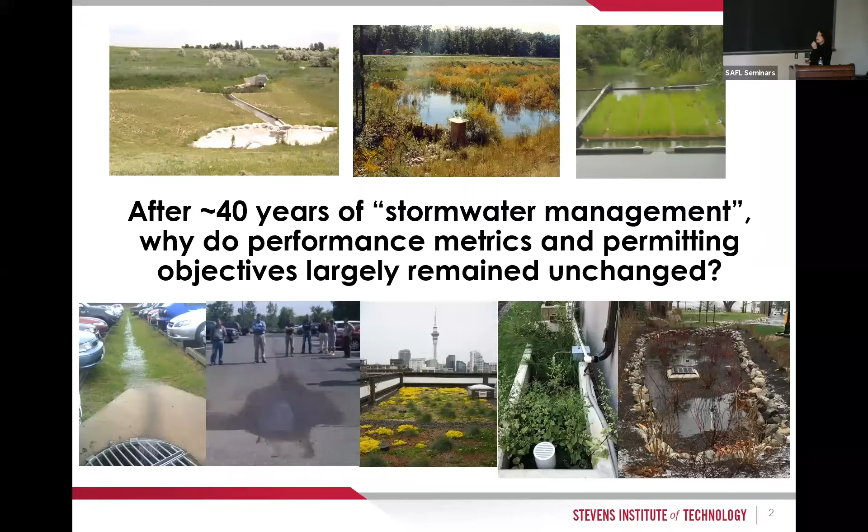All right, but it's been about 40 years of stormwater. It's been about 40 years since the NPDES permits came online, and 30 to 40 years of stormwater research. And we've changed the technologies. We as researchers have tried to improve the technologies, but ultimately, even after about 30 to 40 years of stormwater management, the metrics that we use to assess performance and the permitting objectives, the policy aspects of it, have largely remained unchanged. So I think it's a fair question to ask: if we've been developing these technologies and understanding them better, and we can design them better, but they're still being built to old standards, it seems this is a conundrum, and to me, this is possibly the biggest impediment to actually protecting downstream environments.

It's a really important question to consider these performance metrics, because regulatory services and policymakers tend to be the ones who issue the design guidance. So policy drives BMP design. The policy folks are usually the ones issuing the design guidance and setting minimum standards. And let's face it, the vast majority of designs that are submitted or built are built to minimum standards. So there's a very strong link between policy and design.

I think about these links at 3 scales, broadly speaking. Some jurisdictions have more forward-thinking objectives, but we're talking at the broad scale here. At the site scale, you've probably got a design engineer who's primarily concerned with an NPDES permit.

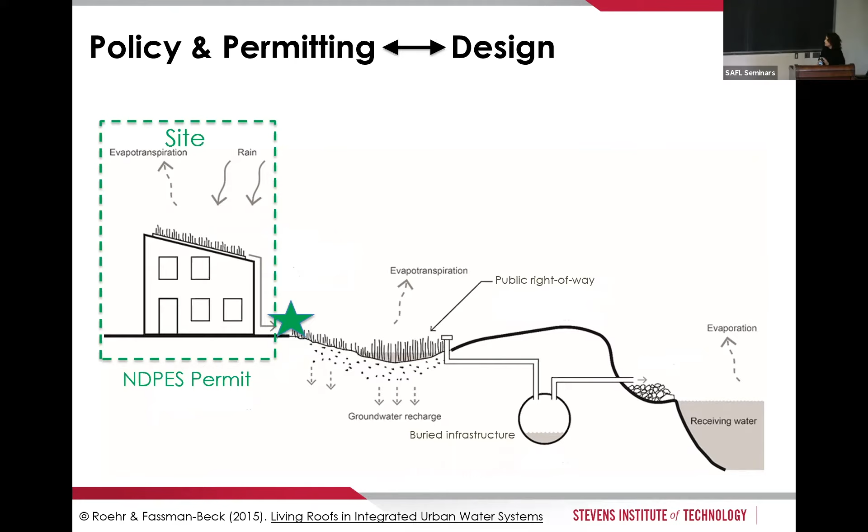Those permit conditions are usually some arbitrary set of flow controls and maybe an 80% TSS reduction. And the design approach is probably based on a rule of thumb and some percent removal, maybe TSS, maybe some nutrients, but that's all they're trying to do is meet those permit conditions.

At the watershed or sewer shed scale, we're really policy driven, trying to meet TMDLs, which apply around here. You've got some TMDLs you're working towards. In the Northeast, there's a lot of CSO mitigation, and broader in the Great Lakes area, there's a lot of CSO mitigation strategies designed at a watershed or sewer shed scale, but again, driven by a policy objective.

But ultimately, what we're really trying to do when it comes down to it is protect or restore a downstream environment. We're trying to protect and restore beneficial uses or ecosystem services. And whatever we do at these scales is ultimately supposed to have an effect over here.

But the question is, with our design objectives, and I'm going to focus really at the site scale today, do the design objectives we have here and the metrics for designing, building, and assessing performance really have any meaning when we get down here?

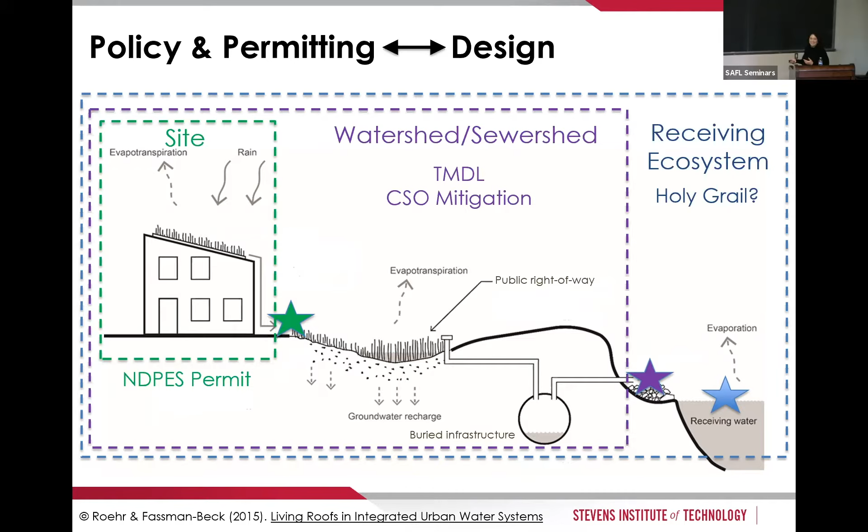So as an example of a typical site-level stormwater control measure or best management practice, what's the term that you guys used here? Best management practice? Okay, so we'll go with BMP.

Right, let's just add the acronym thing on top of everything. So feel free to shout out if I'm using an acronym that does not apply here, and I'll translate. Right, that's my international experience. I can translate stormwater acronyms all over. Now I'm learning a whole new set for Minnesota.

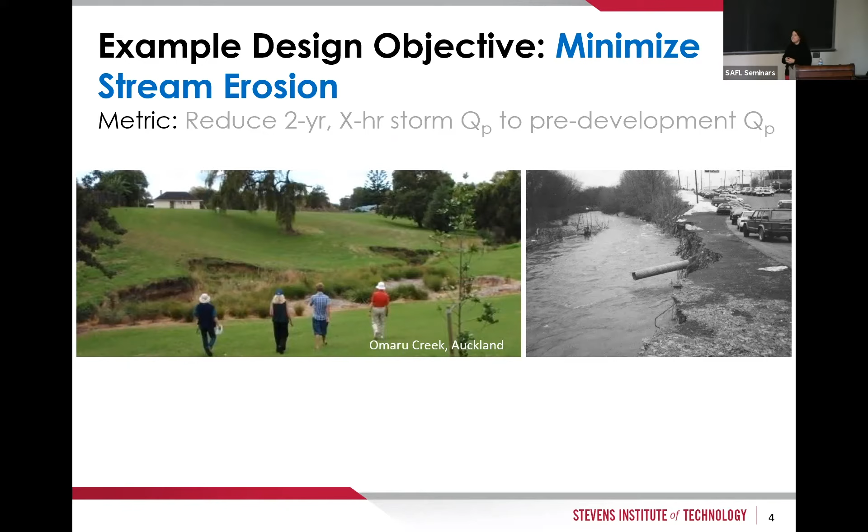Does anybody know where that comes from? I think John does, by the way he's smiling. Does anyone know where this comes from? Research, yes, in 1964 on natural streams. This research, led by Leopold and his group on natural streams, identified that bankfull flows were important in stream geomorphology for shaping the stream channel, and bankfull conditions typically occurred in natural streams from a 2-year flow, a 2-year return period flow, not storm, but flow.

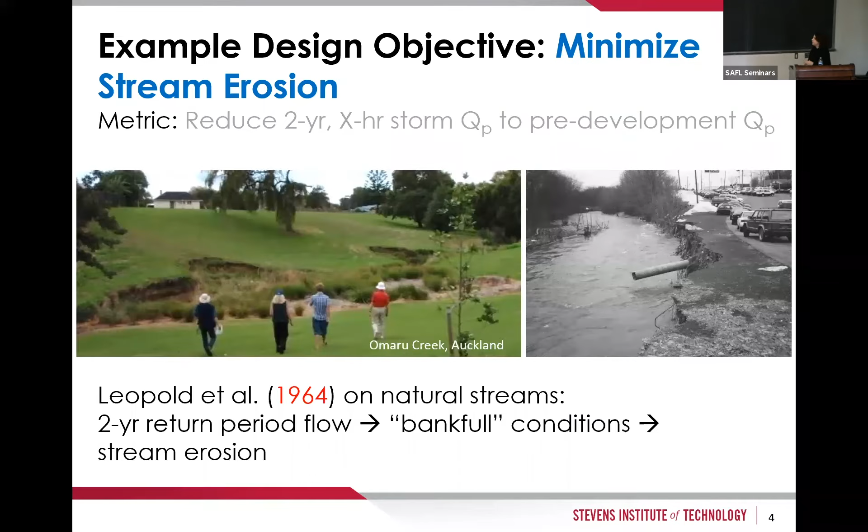So in the absence of anything else, this idea found its way into stormwater management to protect streams from erosion. This is ubiquitous across the US, in New Zealand as well, probably elsewhere. There's some variation on controlling the flow, the maximum flow from 2-year storms. I'm pretty sure that our urban streams are not really natural streams, and a 2-year flow condition is not going to have much of an erosion impact on a concrete armored channel.

And even here, now these urban streams are in Auckland, but even this one that looks somewhat more natural, you guys might have streams that look like this. This one is still a very highly modified system. This low flow dam actually creates an embankment to promote groundwater recharge on the upstream side. So this is a highly modified environment.

Yes, there are ecosystem services. Yes, there are beneficial uses for these streams, but I'm pretty sure erosion, a 2-year stream flow, is not going to be the driving factor of beneficial uses in these environments.

You know, so 1964, there's been a lot of research since then, but even as far back as, and I say as far back as 1996, because now 1996 actually feels like a long time ago. In 1996, State of Maryland came up with this awesome graph. I love graphs. I hope you love graphs too, because I have a lot of graphs to show you. Even on a Monday morning, I love graphs.

So in 1996, State of Maryland comes up with this assessment, which says that flow impacts and water quality impacts occur over a spectrum of rainfall conditions.

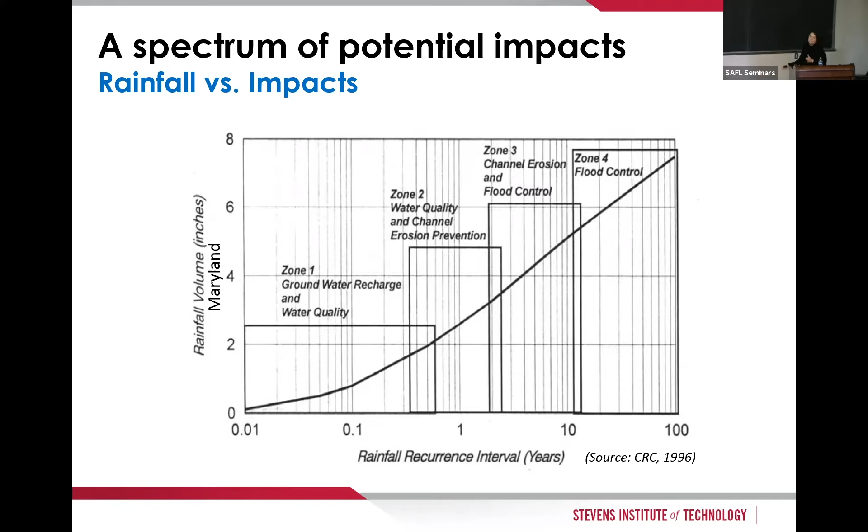Okay, so my objective today then is to just plant some seeds for alternative metrics for BMP design. Also alternative metrics, not just for design, but for how we consider performance, what kind of performance we're considering. And to me, this goes hand in hand, thinking about these BMPs differently, what they're doing and how we design them and what they could do and what we could design them for, goes hand in hand with updating or modernizing our policy and permitting, because they're the ones who hold the design manuals.

And you know, all of this is chasing after that holy grail of having an impact on the downstream environment. I think that we have enough information now, or at least the beginnings of enough information, to really start thinking about how to approach design from a different set of performance metrics that actually could be related to the downstream environment. So I want to give you a couple of examples.

I'm going to rely mostly on my own data. This is not a metadata analysis. I do not have all the answers. I want to start a conversation and show you, and hopefully drop a few little tidbits in there to get you thinking.

So the kind of examples I want to look at are an evidence-derived design of a new green infrastructure LID technology and applied. And basically, this is how we developed green roof technology in New Zealand to do something different. And also a couple of different ways of looking at data that we already have, but in a different way.

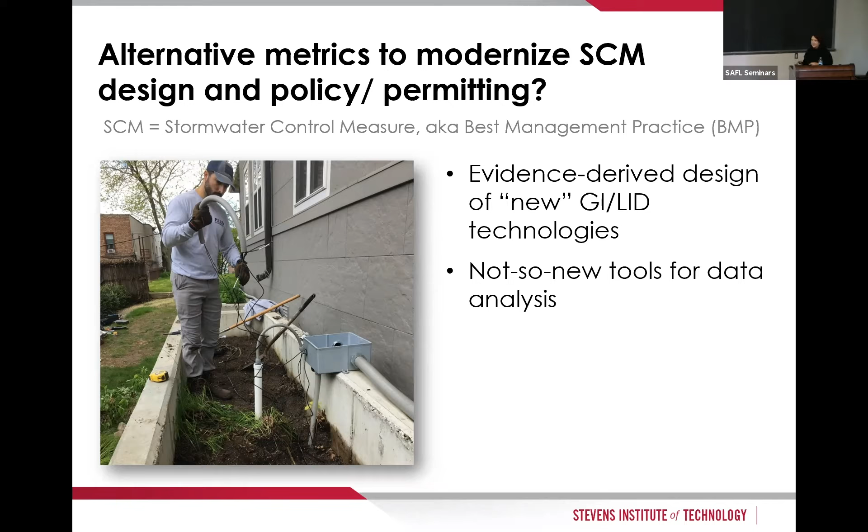And I've written it up here as not-so-new tools for data analysis. So these are performance metrics, or ways of assessing performance, that we all know because we learned about them in hydrology or somewhere else along the way, but we're not really applying them to stormwater just yet. But I think we have information that we can do that.

Okay, so I'm gonna start with green roofs, partly because I've spent a lot of time thinking about green roofs and working on green roof design, but also because green roofs, I think, are a BMP technology that have always been subject to more scrutiny and more misperceptions than other kinds of technologies. And they're not being used that often, partly because they're not necessarily in the design manuals, and that's partly because the regulators don't understand how they work, or they might think they understand how they work and don't believe it.

And then designers aren't choosing them because they're not being credited in a way that helps the site owner. So we've got this little conundrum of when it comes down to it, an engineered green roof is really only a few inches of media. So how effective could it really be, right? How effective could it be for 2-year and 10-year ongoing flow controls? And if it's so shallow and it fills up with water, if you have a really rainy period, it's not going to keep working, right?

We've got all these misperceptions or preconceived ideas about how this technology works that I think are hindering how we think about this practice. Fortunately for me, my research on this technology was initiated at the request—well, not exactly a request, there was a strong suggestion on my part.

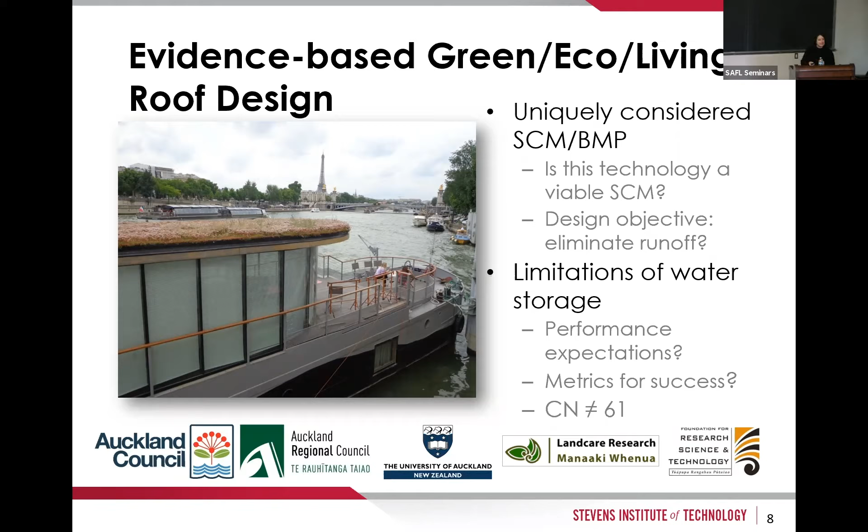to the regulatory agency to look into these systems. So we were able to approach green roofs with an open mind and no preconceived notions. The objective from the regulatory agency was: we're really interested, figure out how to design and build it and what it should do, because right now our manual just says it's a curve number of 61, and I'm pretty sure that's not how it actually works. So we really had a wide open purview.

Here I believe you use the term green roof. In Portland, it's an eco roof. In New Zealand, we adopted the term living roof, because it is a living system and that's integral to the performance. So I'm just going to go back and forth with all these different terms.

This slide breaks lots of rules, like way too many things, but this is what we did. We did all sorts of cool stuff to figure out what materials to use, how to test them, what metrics to even use to assess performance, because we know this isn't going to work like a pond—so how do you even judge whether it's working or not? How do you test the materials, the whole gamut, from a true R&D perspective.

I want to point out this is my research partner, Dr. Robin Simcock from Landcare Research. Robin does not like to have her picture taken, so these are the kind of pictures you get to share of Robin. But she's a soil and plant scientist, and to me this was the key to figuring out how to understand how this system works. Because of Robin's expertise, I learned to think like a plant, and that's a totally different way of approaching design, but kind of critical if you're working with a planted system.

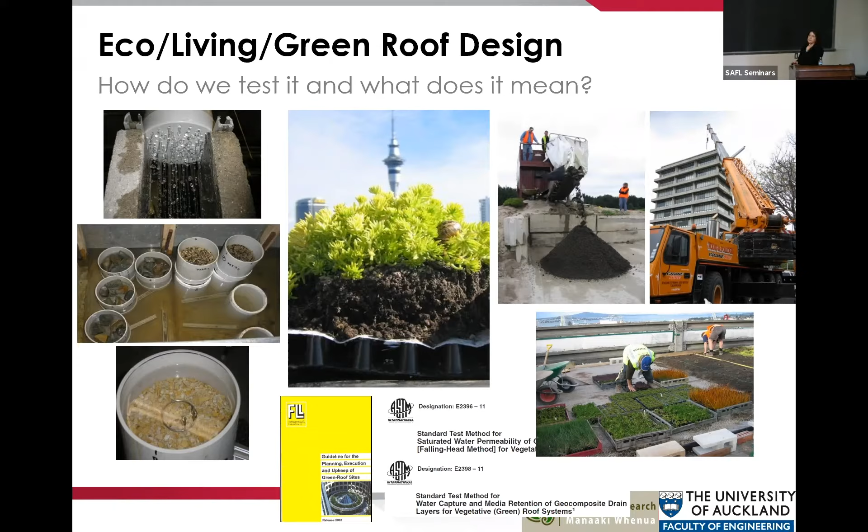As we went into this, we had a lot of questions about not just the procedures, but the interpretation of the data that comes out of the testing regime, and what that would mean for performance—does testing in a lab have any impact whatsoever, or is it at all related to what you get under field conditions? So real questions about the design procedure, the tests you have to do for the materials, and whether it was going to predict field behavior at all.

So a little story about thinking like a plant and how we translate that into an engineering context. What are the parallels for engineering? We have to look at moisture storage in porous media. I am still a professor for another couple of weeks. Okay, so let's think about how we define moisture content.

We need to think about three—actually four—states of moisture content in porous media. I'm talking about any engineered media filled green infrastructure system that has no exfiltration: a lined bioretention cell, a concrete lined bioretention planter, a lined permeable pavement, and a green roof system. We're not exfiltrating to the surrounding soils, so it's really important to understand the moisture dynamics within the system in order to predict how well it's going to work, to design for a flow control objective.

If our moisture content equals the porosity, that means all the pore spaces in our soil parcel are filled with water, that's the blue, and then you've got these little soil particles. We measure the moisture content as equal to the porosity - this is saturation.

If our system has filled up with water, with runoff in our case, the runoff stops and there's no exfiltration, but we have an underdrain, so water discharges out of it. When that drainage stops, we are at a moisture content referred to as field capacity. We still have some water in there, but some of the pore space is filled with air, so we have a mixture of air, water, and soil particles. There's no more gravity outflow, but our soil is still wet.

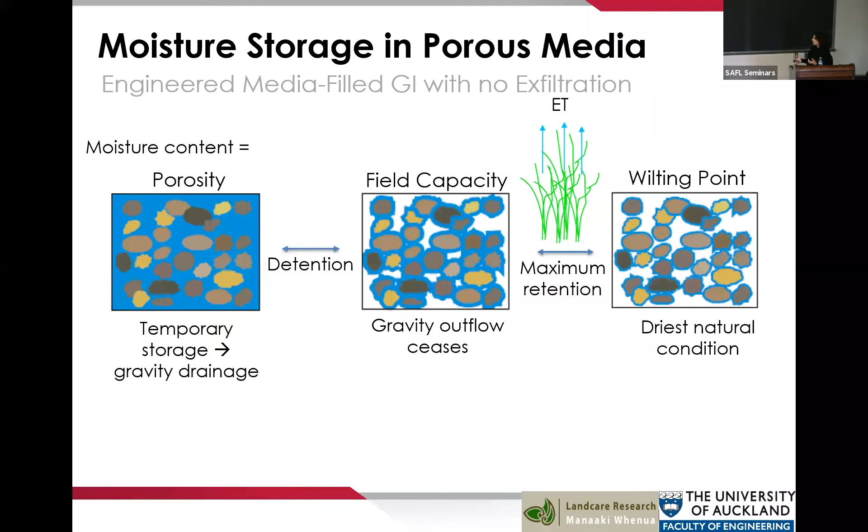The difference in moisture content between field capacity and the wilting point gives us an amount of water that, in theory, is equal to the maximum amount of retention we're ever going to get from the system, just counting on the media itself. So our retention or volume control is the difference between field capacity and the wilting point. In plant science, you call that plant available water, the quantity of water.

Now, that's the way soil science and plant scientists think about moisture dynamics - you've got these three states and these natural processes. Well, an engineer measures moisture content by sticking a sample in an oven. So we take our sample that's at field capacity, put it in an oven, dry it to oven dry, and we get a measure of moisture content. I'd call this a geotechnical engineering approach to measuring moisture content. It's also the method in that German testing procedure, the FLL, and now in the ASTM standard.

So back to our story in Auckland, what we were trying to do was design a media that maximizes stormwater capture. In the process, we wanted to figure out how to create some specifications for what that should be, how you should measure it, so that's going to give us some indication of our stormwater capture - an actual measure of stormwater capture.

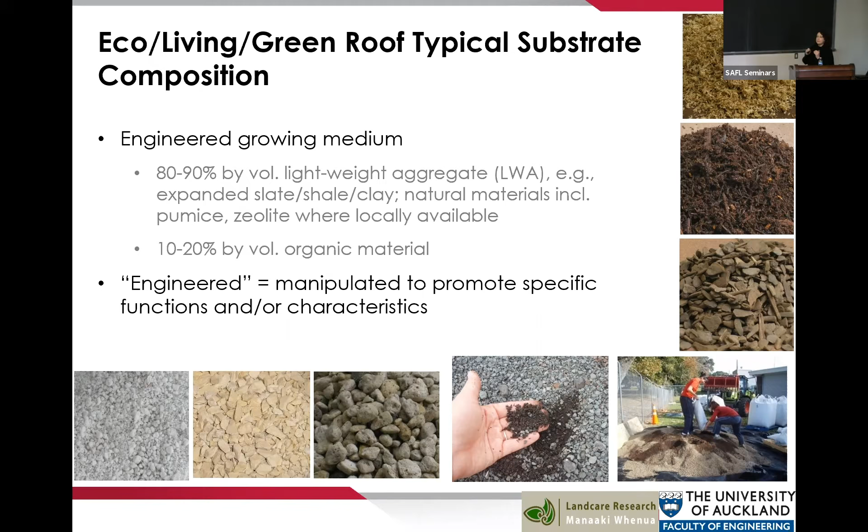Okay, so an engineered substrate - is everybody cool with engineered substrates? You've got a mixture of potentially natural or man-made materials with some minor fraction of organic content to help the plants grow. But the key thing about an engineered growing medium is that we can manipulate the characteristics of that system to manipulate field capacity and wilting point. We can design it to maximize the difference between these two because we're engineering the substrate.

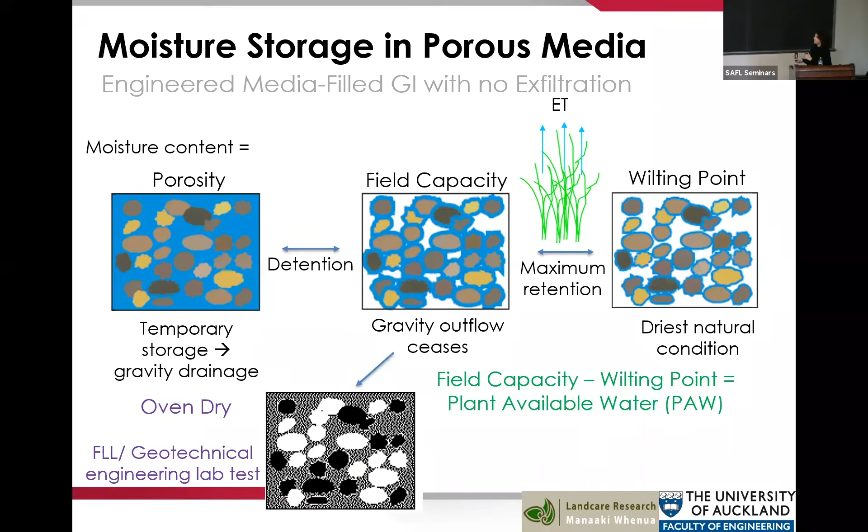So science meets engineering. Over time in Auckland, we designed a lot of substrates and built a whole bunch of green roofs and monitored them. Our main systems - these are just the names of the 3 different sites - we wound up with varying design combinations of materials and depth of green roof, and measured them for, in some cases, 6 months, in other cases, over 2 years.

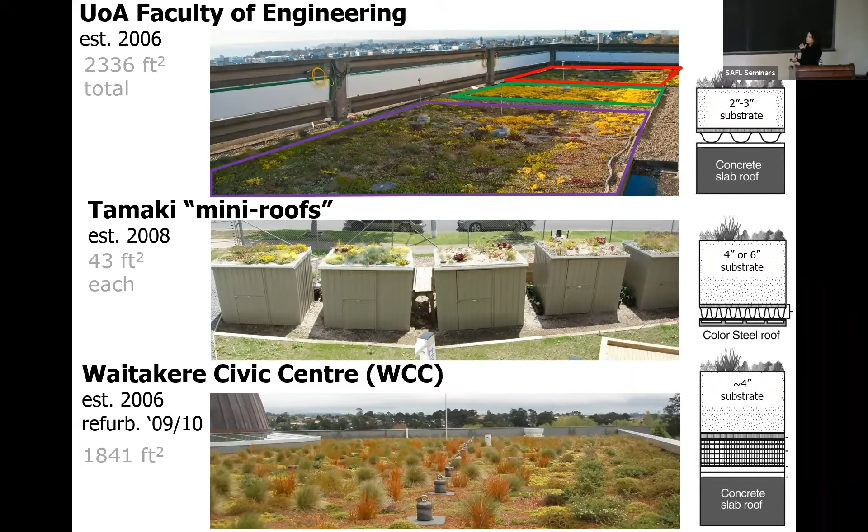Okay, so here's the question: how do we assess the materials in the lab to have some effect on real life, or to have some prediction for real life? And then how do we manipulate those materials to maximize that benefit? So we extracted from all this data we collected, we looked at 3 different ways of measuring moisture holding. The blue diamonds are that plant available water, how the plants think, or how the plants in the soils actually behave for that difference between field capacity and wilting point.

There's another step measured using a horticultural technique in the lab, or agronomic methods in the lab, where we can add a little more water. That's plant available water combined with something called stress water - the details don't really matter, but it's another ag measure. And then we compared it to the prediction from the geotechnical test.

So the bottom line is, we have 3 different ways, 3 proposed methods for measuring stormwater retention in the lab, compared to what's happening in the field. That's what we're trying to assess here. Do any of these 3 test methods have any impact or relation to what's actually happening when it rains?

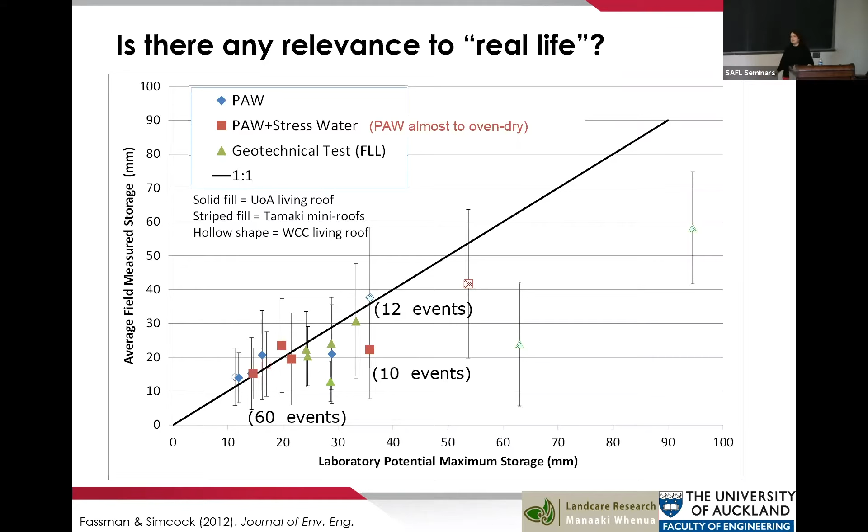So it turns out, long story short, this graph doesn't look like much, and there are big error bars. But this is actually hundreds of data points - 5 different substrates, multiple depths, condensed to be able to see it. That data point is the average of 10 events, plus the bars showing the range. That one has 12 events behind it. Over here, there's 60 events behind this one little data point. Right now, you're supposed to say, whoa, that's a lot of data. There's a lot of evidence supporting this.

And what it boiled down to: on average, the maximum event retention that we actually measured in the field was statistically not different than our lab measure of plant available water.

So all of a sudden it's like, oh, well, those plant scientists might be onto something, right? But as an engineer, I can manipulate that factor of plant available water in the design of my system. And I'm not picking on the plant scientist - she's changed the way I look at everything. So this is really all in honor, in awe. Anyway, this discovery led us to win the 2014 ASCE Horner Award.

Moving forward, why is this important? What can we do with this? Oh sorry, skipping to the punchline.

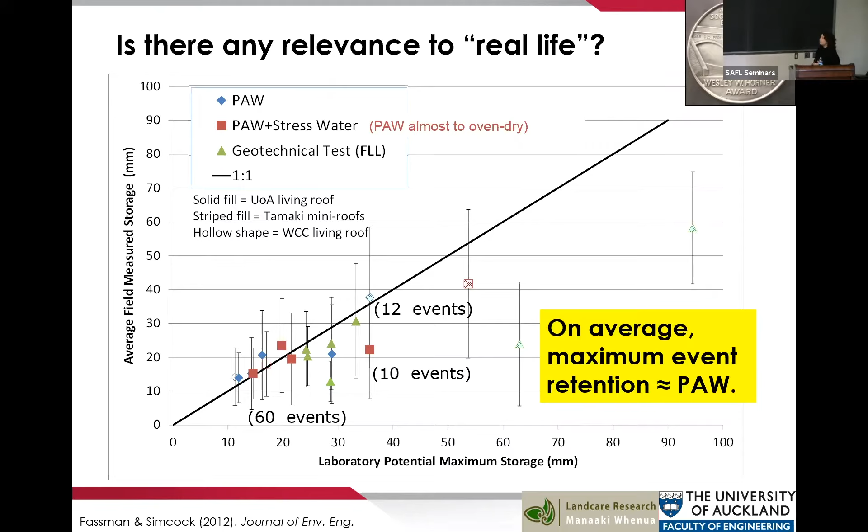So this is great, but now I'm telling everybody you need to think like a soil scientist. We need to do different tests, learn different methodologies and different ways of thinking about things. And really the geotechnical test is much easier to do - stick it in an oven for a few hours, you're done. The agronomic test takes days; it's not labor intensive, it's time intensive. You set it up and just let it go. So the geotechnical test is easier to do.

What happens if you use the geotechnical test instead of our plant available water? Well, in our substrates in Auckland, it turns out you make a big mistake. Using that geotechnical test, or the FLL testing procedure, almost doubled the estimate of stormwater retention. That's going to be a big oops in terms of interpreting whether this system will protect a downstream environment, if we're actually predicting double the capture we might achieve.

In this case, I think the reason this difference is so significant is that our substrates primarily rely on pumice as the aggregate. Pumice is the coolest rock ever because it holds water in its pores, and that has a real advantage for stormwater capture. If you were using expanded clay or expanded shale or some of the other expanded man-made materials, I'm not sure the difference would be quite as strong, but I don't have that data to show.

But that's a hypothesis. Okay, so how do we turn this into design? Well, now I can say, okay, I've got a design storm that I need to retain. I want to retain a 1-inch storm, or in New Jersey, a water quality storm is 1.2 inches - I think in North Carolina as well. I want to fully capture a 1.2-inch storm using a green roof.

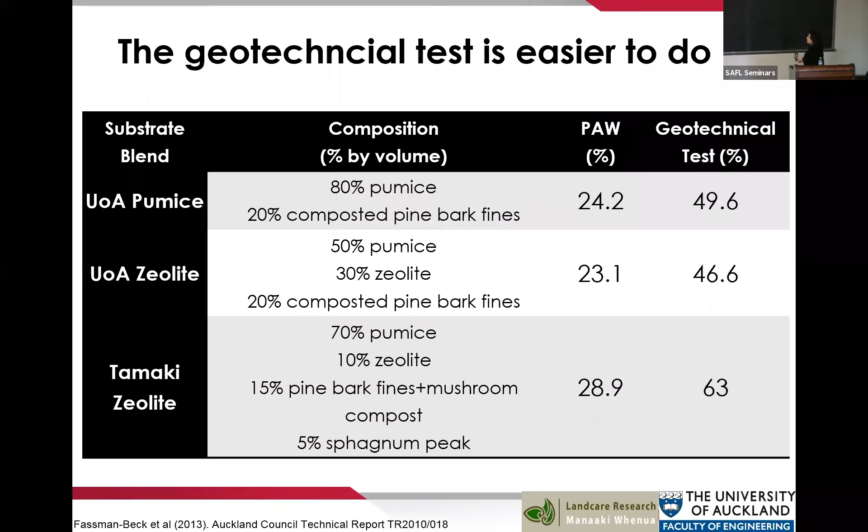Okay, oops, sorry. I had the same problem when I was doing the TED Talk. Actually, it wasn't me, it was the clicker. Brain break for a second, just think about all that while I tell you another story. So I'm standing facing the audience, I have no view of the screen whatsoever, and I can't look back because you're doing a TED Talk. And the clicker, every time I pressed it, would skip forward like 10 slides. The audience was looking at me like I was crazy. Finally my department chair goes like this, and I turn around. Anyway, after that, they knew to tell me every time. Okay, refocus, a little bit of a laugh, something.

Alright, so here I've been designing for a 1 to 1.2 inch storm. That's great, but what do I do about that 2-year event? Because I still have to meet that 2-year event for my permitting.

Yes. How did you optimize for unit weight? Half weight, get twice the depth. Okay, good question. So the question is, how did I optimize for weight? Because with half the weight, I could get twice the depth. So it turns out, that's a good question.

It turns out that this relationship is only good up to about 1.2 inches. Empirically, with data - not only my own data, now I've looked at data from a lot of different places, people are really happy to share their green roof data - it seems like there is a maximum capture from a green roof system that hovers right around the 1 to 1.2 inch depth when we're relying on just the media alone. There are a lot of other design criteria for the media, for safety.

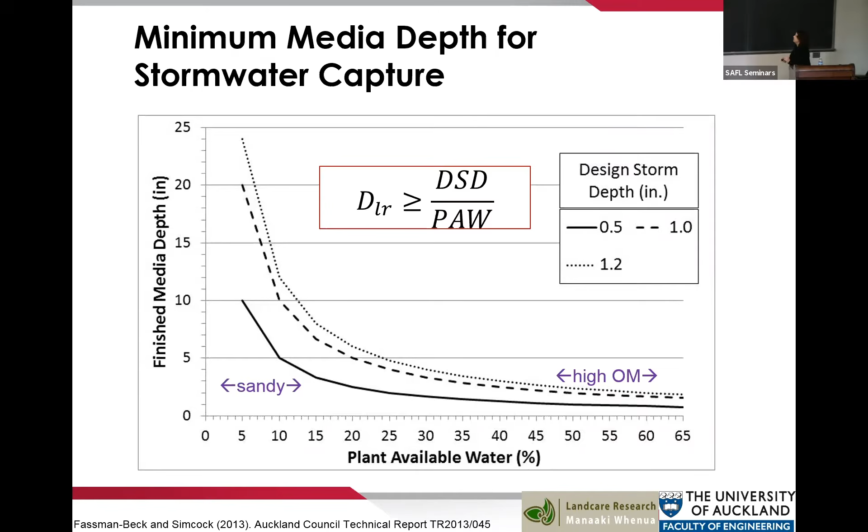Okay, so how about in the context of our 2-year event, because we've still got to go from our site scale to our receiving system impacts, and a 1 to 1.2 inch event is definitely not a 2-year event. In New Jersey, a 2-year event is about 3.5 inches. So how does this fit into that spectrum? Instead of just crossing the technology off the list because it might not meet that 2-year flow, what else can we look at that it does do that could be really beneficial for protecting those downstream environments?

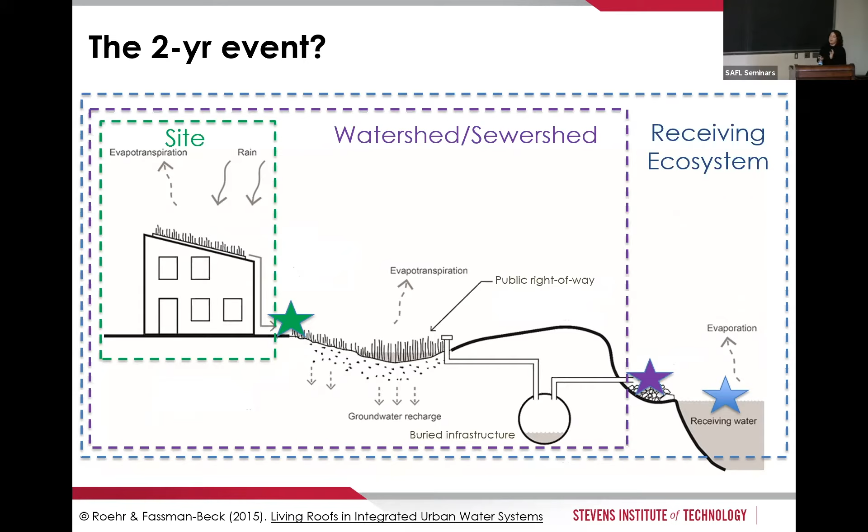So for us, in this case with green roofs, some researchers in Norway have presented us with another way of looking at the data, using flow duration curves. How many people have taken hydrology? How many remember flow duration analysis, and what's it used for? Downstream assessments, receiving stream, habitat quality, maintaining minimum environmental flows - that's often a lot of what it is. Probably flow duration is used more for power supply around here? I just realized, maybe, no? Okay, never mind, we'll go with the downstream flow ecology, go back to that. So this is a tool we know, but we're not using.

So these are a couple of flow duration curves developed from monitoring data from a couple of roofs in 2 cities, Oslo and Trondheim, in Norway. I'm borrowing this data because I was fortunate to host the PhD student who did this work. She came and worked with us at Stevens for 4 months, and through our discussion we came up with looking at her data using this flow duration analysis. So what does it do? A flow duration analysis demonstrates compliance or exceedance with an allowable discharge rate under all conditions. For example, in Oslo - I'm going to say it wrong - one of these cities, hang on.

In Oslo, there is a known sewer capacity. Imagine that, you actually know the capacity of their sewers. That's awesome, I wish I could say that for every city. There's an allowable discharge rate from a developed site of 10 liters per second per hectare of your site, in order to maintain capacity in the downstream sewer.

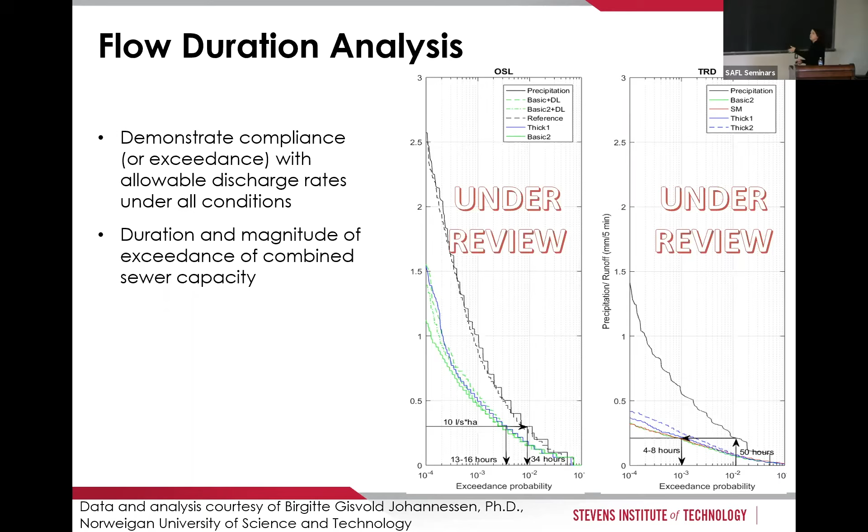Okay, if flow duration analysis is too hard, and sometimes I think it's too hard, we can look at just a frequency analysis of your peak flows. So this was from my permeable pavement monitoring in Auckland. I have the same graph for all my green roof sites, but I just wanted to throw another technology in there for fun.

Looking at the occurrence of peak flows of certain magnitudes: our black line is the uncontrolled asphalt catchment peak flow, the dashed line is from the underdrain, and the gray line is the modeled pre-development runoff. So just the occurrences of peak flows are happening nearly on the same spectrum as our pre-development condition. That's pretty cool, and that analysis is really easy to do.

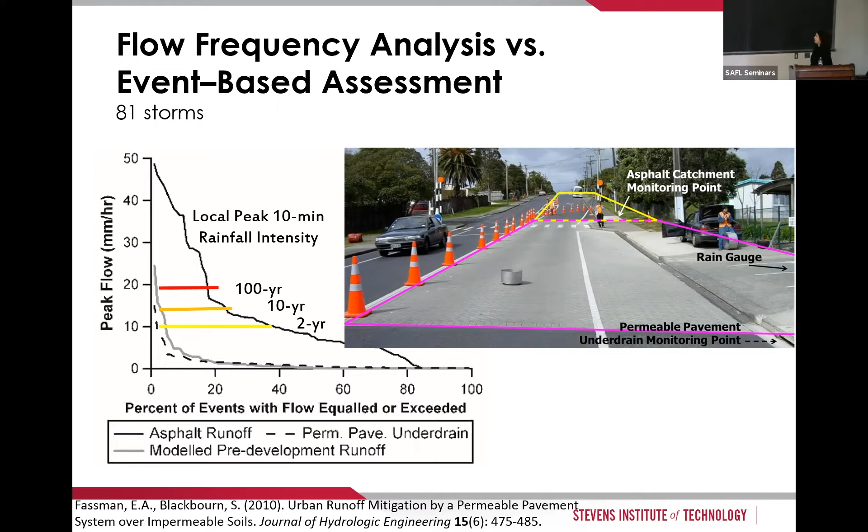We can also see that our 2-year, 10-year, and 100-year storms are pretty close to our pre-development conditions. And that's looking over a spectrum of events, not just this one day that it rained with this intensity.

All right, I want to talk just for 2 minutes about water quality, hopefully 2 minutes. Gonna go back to green roofs—again, I think about green roofs a lot, I do a lot of work with green roofs. Our typical water quality objectives for the metrics we use to assess whether a BMP meets a water quality objective is usually an 80% TSS reduction, right?

Is that your objective here? Around there, okay. So somewhere between 70 and 85% TSS reduction, maybe some percent reduction of total nitrogen and total phosphorus. Really, what I suggest is we should be considering the nutrient forms that are actually contributing to eutrophication downstream. It's not total nitrogen and total phosphorus—inorganic nitrogen and orthophosphate are the forms of nutrient that plants can uptake. We should also be looking at effluent quality, not just a percent reduction. I feel obliged to say that, but I'm not going to go into detail. I'm going to talk about the nutrient forms for a second.

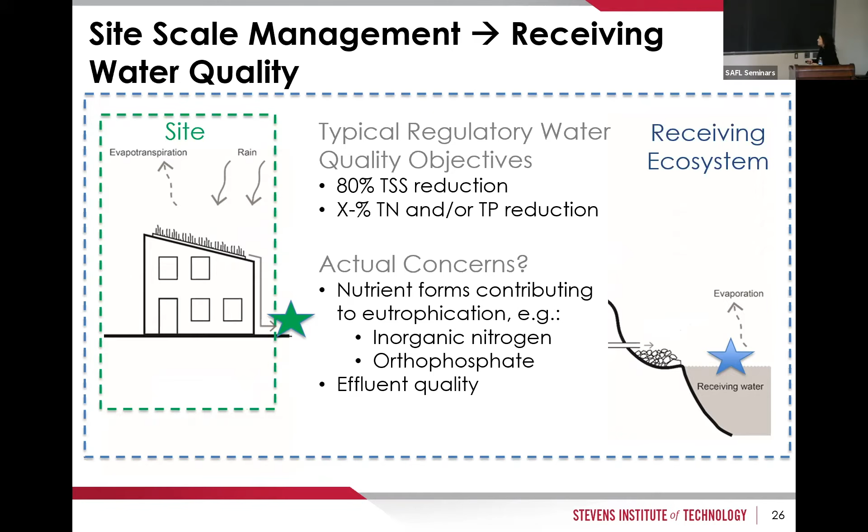Okay, so magic number—here's another good little history lesson. Where does 80% TSS removal come from, and why is it the objective across the country? I've cheated, the answer is on the slide, I didn't do my animations right. This magic number of 80% TSS removal came from the 1993 CZARA, Coastal Zone Act Reauthorization Amendments. In the absence of any other information, to protect coastal zone quality, they came up with an 80% reduction, and that made its way into NPDES permitting and remains to this day.

Through the NURP program in 1983, we also found out that there's a lot of other stuff in stormwater, but we know how to do sedimentation. We've got all these basins out there for flood control—let's just enhance the sedimentation, and we're gonna hope that we remove other pollutants by default.

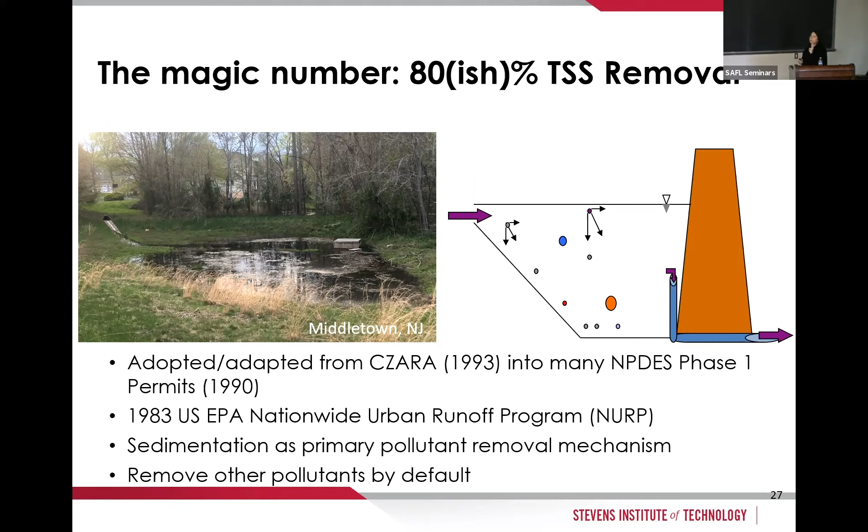But really, this is what we're trying to avoid, right? Here's a detention basin. Yes, there are nutrients in there. You can tell by that algal bloom, right?

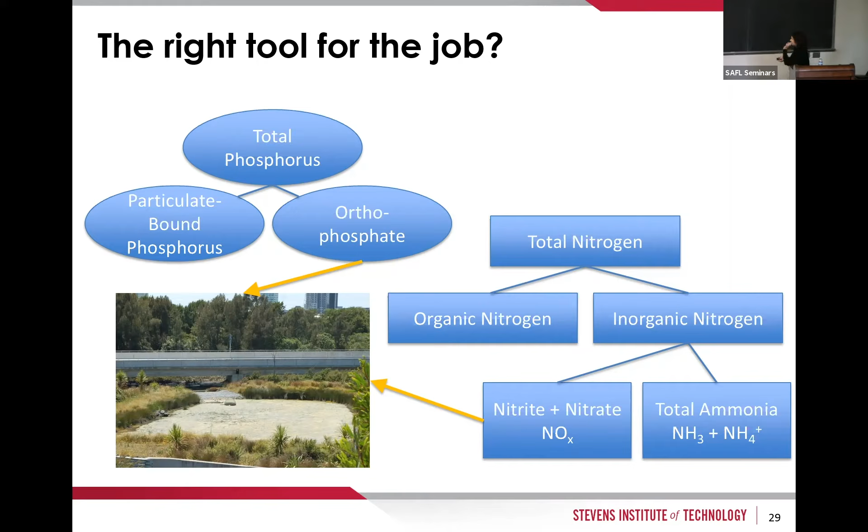So I'm not really sure this is the right tool for the job, nor is assessing total phosphorus or total nitrogen. I already talked about those. We have other forms that contribute to eutrophication. So, going back to my green roof data—sorry, I just shouted in the mic to those listening online.

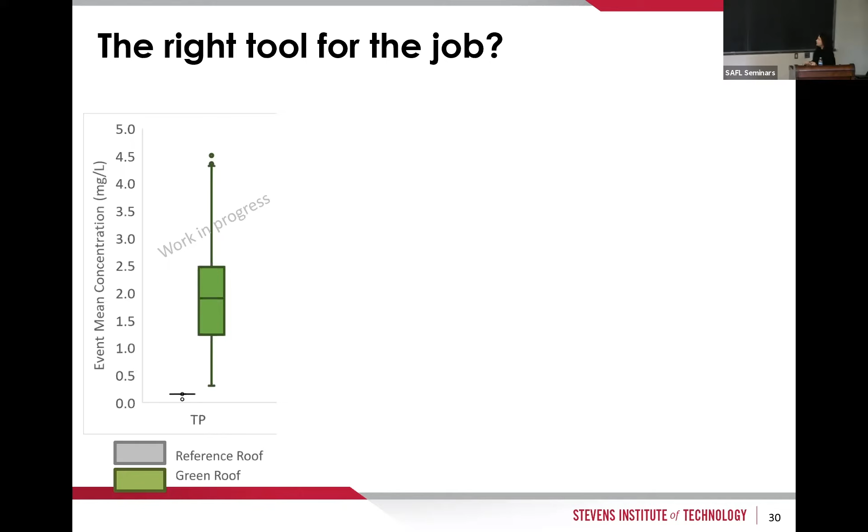So I'm kind of picking on green roofs here, but I love green roofs. We're gonna get there, there's a solution. If we're looking at total phosphorus, we're missing a big part of the picture.

If we're designing for total phosphorus removal and sedimentation and particulate matter, it turns out that 91 to 95% of all the phosphorus in the green roof discharge is orthophosphate. It's dissolved. And if I'm designing for sedimentation, I'm not going to affect the problem, or I'm not going to create a solution for this problem.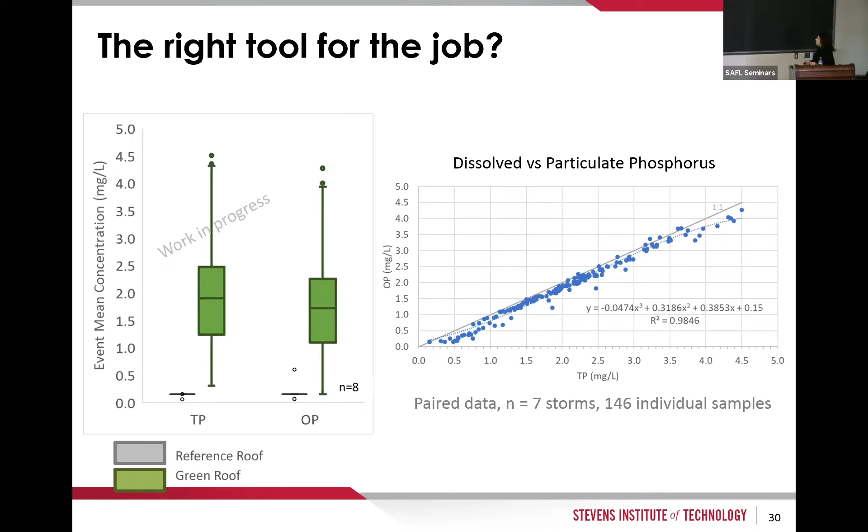So, as I said, I love green roofs. I love green roofs everywhere, including my dad's HO scale train set. Green roofs receive a lot of attention for different reasons. I'm not trying to pick on this technology, but it's a technology that's under more scrutiny than most, and the concerns about nutrient discharge seem to be a bit loud.

And we're picking up on that same conversation for bioretention, right? How do we design our media so that we have a sink for pollutants and not a source?

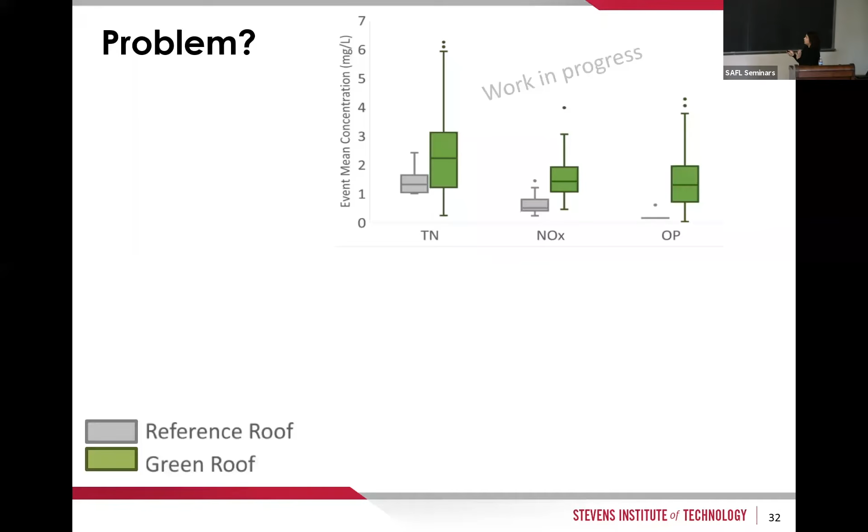Okay, so here's our problem. Looking at event mean concentrations of nitrogen and phosphorus, there's more nutrients in the discharge from the green roof than the reference roofs.

We have two choices for designing a solution to this, or rethinking how we design the system. We could increase retention, we can go back to manipulating the properties of the media, but that's still not addressing the whole problem, right?

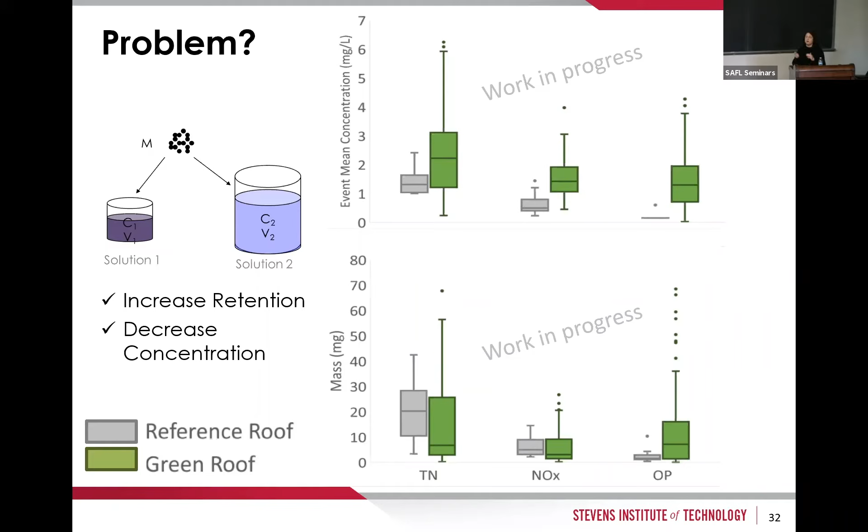Because when we look at the mass discharge, when we incorporate that retention aspect, yep, we're having an effect. It's going in the right direction, but we haven't totally solved the problem. We need to work on decreasing that concentration. We cannot rely on the flow control or the volume control alone.

So here's our 38 pilot scale green roofs at Stevens Institute of Technology, where we're systematically changing the materials used in the media to address nutrient control and capturing water quality samples.

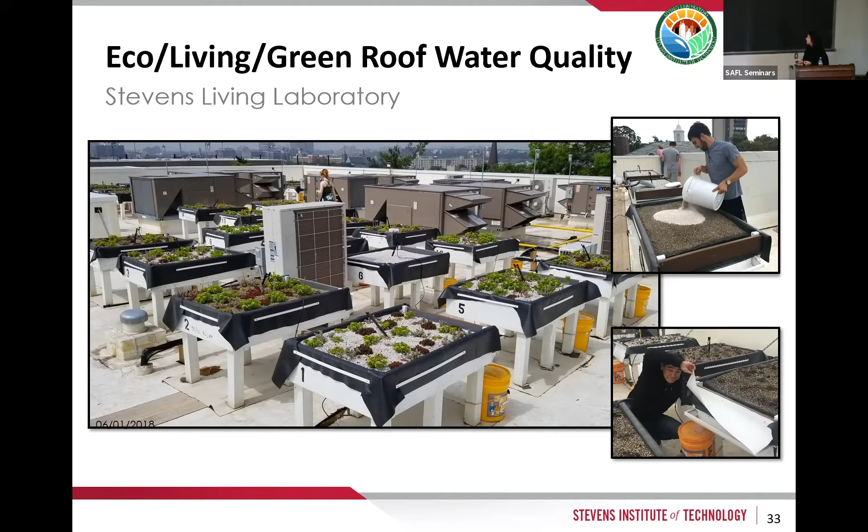Sorry, let me go really quickly through the end of this—the innovation for a solution. So we're looking at the materials in the green roof, but we're also looking at innovating a solution with a downstream permeable reactive barrier. It's just a strip of another material at the downstream end that hopefully preferentially captures these nutrients.

This PRB material, we're currently testing 3 different materials for all of our substrate combinations. But you could retrofit this onto an existing roof because it's a downstream control. And we seem to be getting somewhere, right? So here we're affecting that concentration, and that's affecting the mass as well.

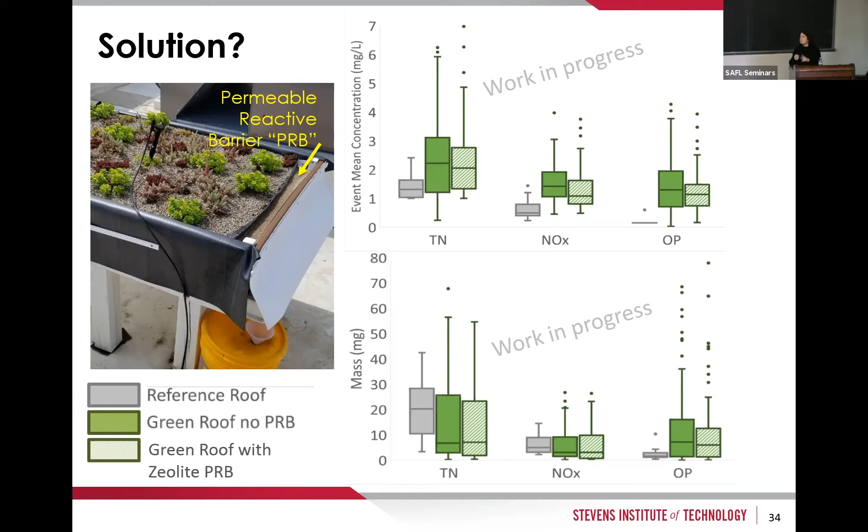So by looking at the right form of pollutant, we're able to create the right solutions to protect that downstream environment.

So where does this get us to? I don't have all the answers, but I think we have a lot of tools and a lot of data available to us to start thinking about technologies in different ways and solving different problems that we have evidence now that we can relate to a receiving environment effect.

And I put friendly scientists on here because working with scientists has changed my whole perspective on everything. Professor Gulliver and I were talking just before the seminar started, and as an engineer, I feel like I have enough science to kind of be dangerous, right? I have enough science to create a solution, but I really need to go back to those scientists and get their input to say, well, what actually happens downstream? What's the design point? What are the design points I need to protect that downstream ecology or the ecosystem services?

And I can back that up into a BMP design that's actually meaningful.

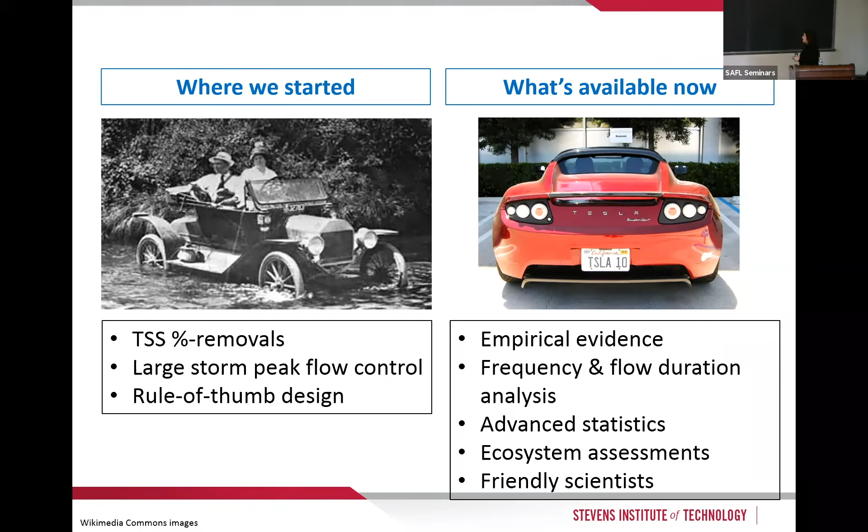A last little thought from a bathroom stall in Newark Penn Station, which is not usually my go-to place for inspiration, but this was a little gem: if you change the way you look at things, the things you look at change. I think we need to broaden our perspectives, not only as designers, but we really need to be working with policymakers, because they write the rules.

And with that, I'll say thank you. Despite heading to California, I fully intend to keep operating the Living Laboratory. There's a whole lot more going on that I didn't get to share with you, because I could talk for hours.

This doesn't happen without lots and lots of help from undergrad students, graduate students, some volunteer help from the US EPA, and from software engineering, because we've got so many instruments going. I couldn't possibly manage all that data by myself. The power of software to make my life easier is amazing, if you're talking to people who know how to do it. And lots of support from facilities management at Stevens, who've helped me build all this and make it happen, and from undergraduate research support programs at Stevens, helping bring in the people needed to make all this happen.

And some funding support from Washington, D.C., Department of Energy and Environment. That's not specifically on the green roof water quality, but that funding is ending, and we really want to continue. We've got three years worth of data, and that is just the tip of the iceberg.